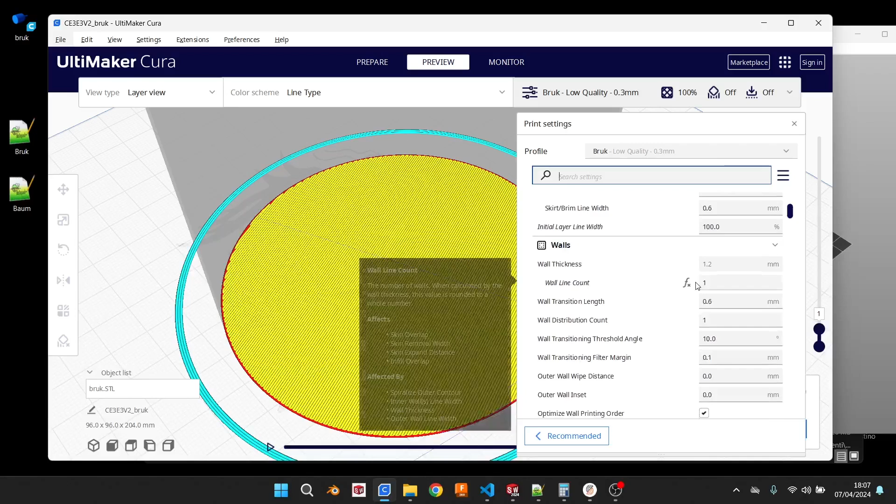Bruk and Baum are sliced with vase mode and with settings similar to these ones. I say similar because I did it some months ago and I don't remember exactly how I did it, so I'll try my best to reverse find how to slice it. So here I'm showing the settings.

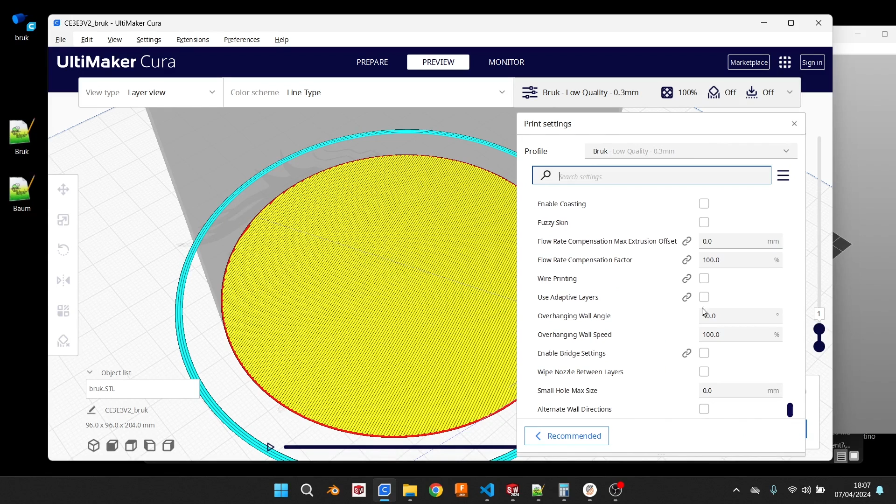These are temperature for polypropylene, and the important setting is the line width, which is 0.59, and layer height, which is 0.3, and also vase mode. So we have 4 bottom layers and only one wall with the infill zigzag 100% and connected lines with a lot of overlap. It's, I think,

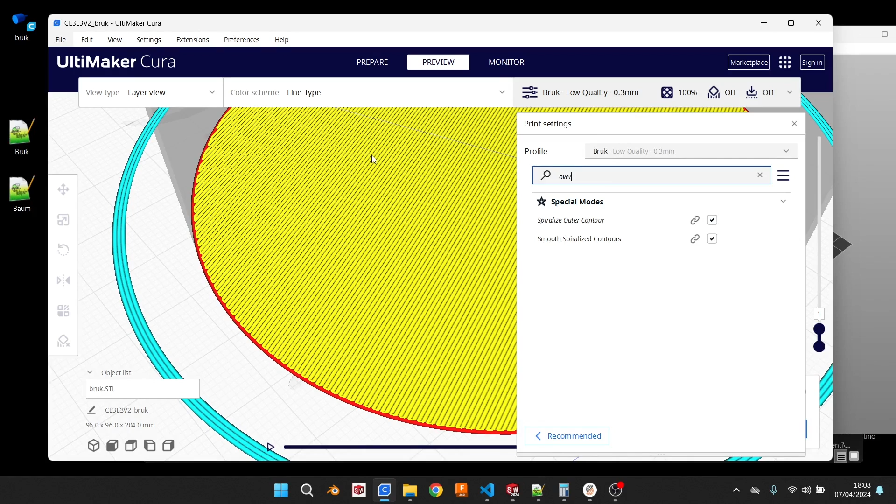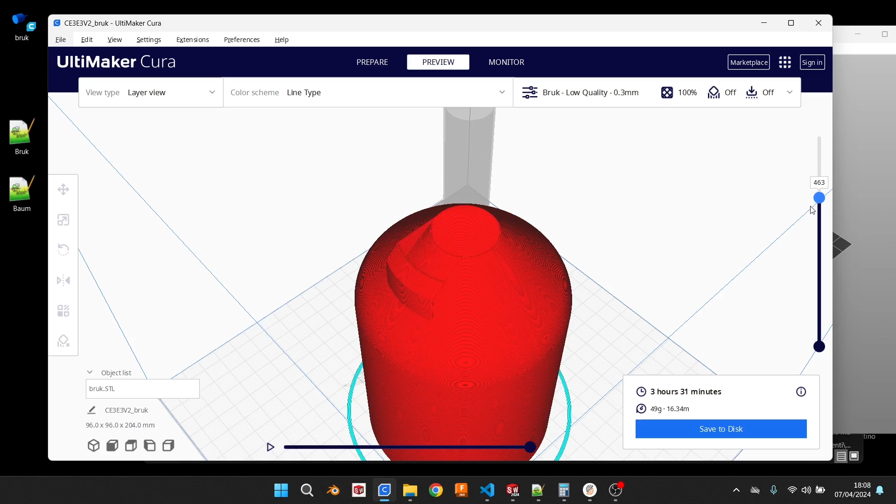80%. So let's see, this is the first layer, the second, the third, fourth, and then we start with the body, which is vase mode. And then here, which is the part where the top goes, is still in vase mode. So the line goes like this.

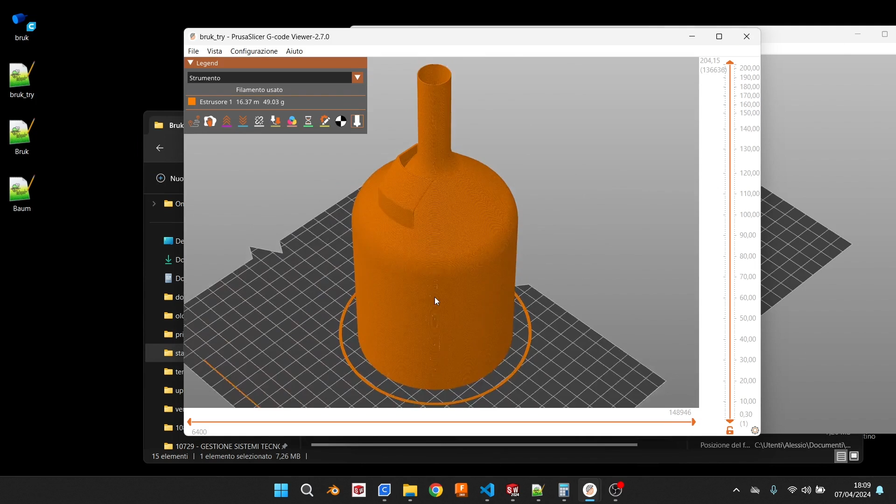Okay, the problem is that it's not enough to make only one G-code, because we would have some problems. So first, I used different flow for this part, which is straight, and this second part, which has a bit of overhang. In fact, I used 0.3 layer height and 120 flow for this.

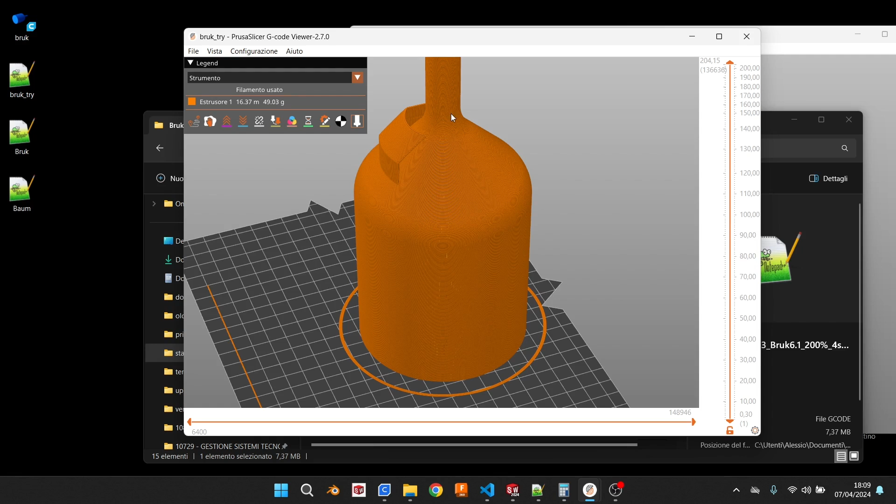And then I joined this first G-code up to here with a second G-code which goes from here to here, and which has a different layer height of 0.2 and a much higher flow of 150. So also a bigger line width. We have the same line width, but if I increase the flow, obviously the line width is 1.5 times the line width I would have without increasing the flow to 150%.

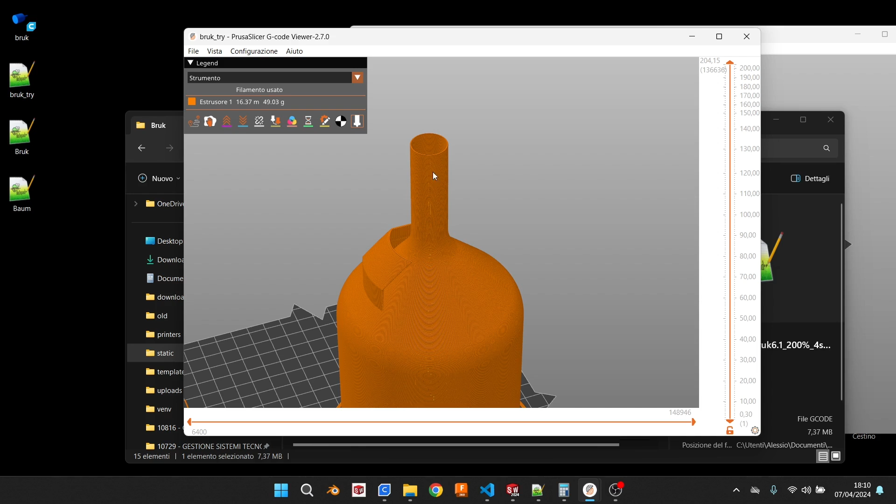So from here to here. And the top from here to here, it's 74% of 150, I think. But the bottom line is that this has a final line width of 0.5 and a layer height of 0.1.

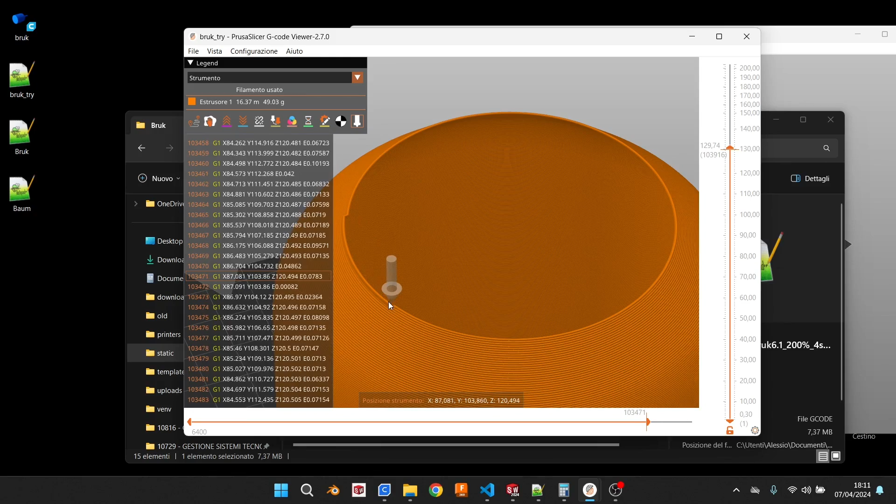So I joined the 3 G-codes together, and here we see another problem we would have is that in this area, the nozzle goes up to here, and then it comes back on the same line, and it goes back like this. And we would not have these two lines attached one to the other.

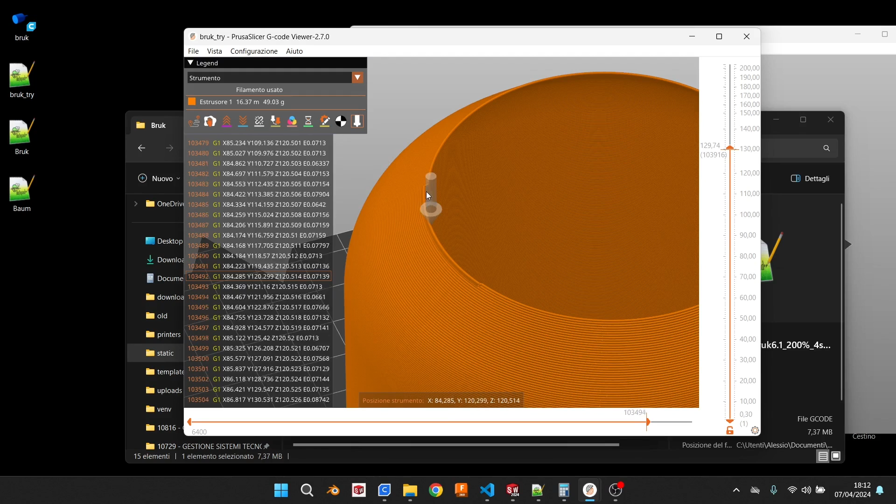So what I did is I used a Python script to change the X coordinate of this line from here to here to have it a bit on the right. So we would have this line, then a line a bit on the right when the nozzle comes back, and then from here finally the third line. So if we have 3 lines instead of 2, we would have them joined together. So let's see the final G-code.

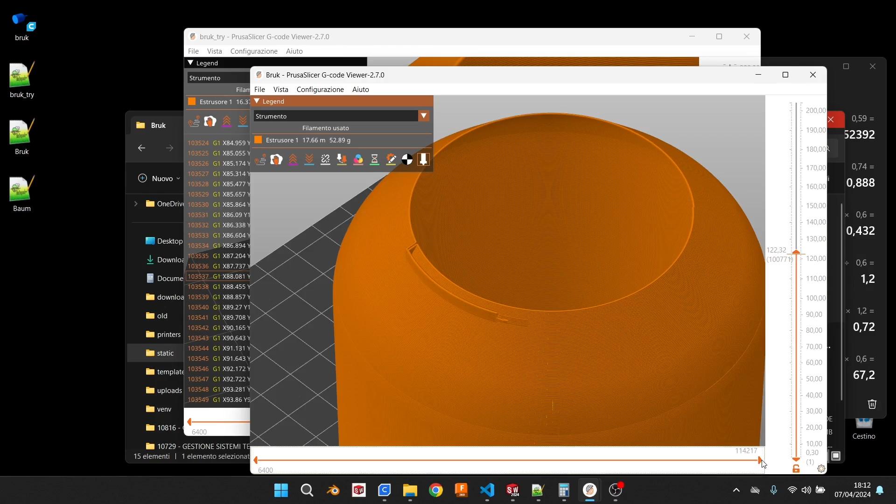So we have the first line here. Then it goes a bit longer because I saw that here we would have some water leaking. Then it comes back a bit shifted on the right, and finally shifted again on the right. It's shifted by half line width, so it's, I think, 0.4 shifted.

Okay, so this is the first modification I made, and I used this Python script where you can set the offset of the G-code on the X and on the Y. Here we can also see that for the same problem of water leaking, I increased the flow of some lines around this area to 200%.

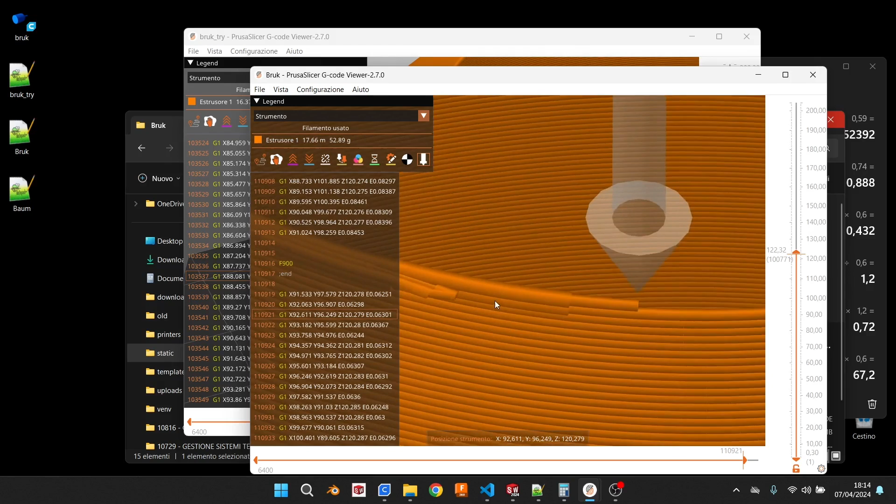So for example, from here to here, you can see the line is a bit bigger because I increased the flow. So from X, so here, and I wrote it in the G-code, flow is increased to here, and then it goes back to normal. So as you can see, this line is bigger than here.

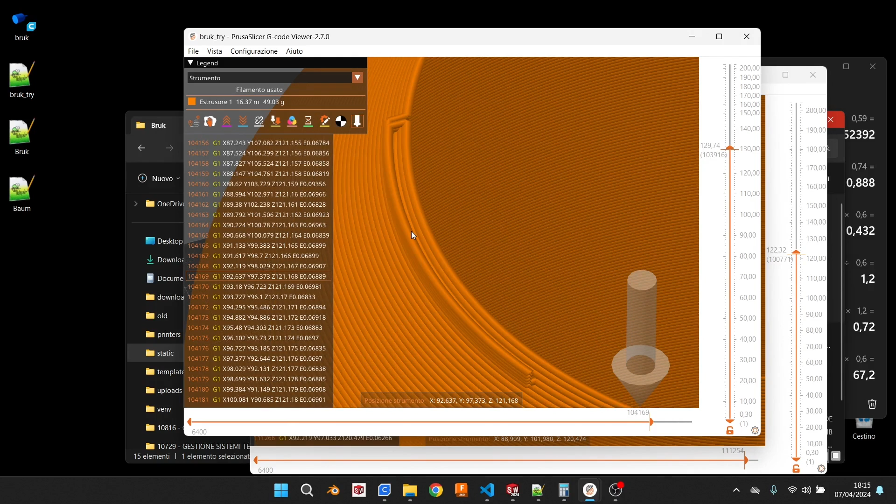The shifting on the X, I did not do it only on the first layer I showed you, but for I think 1, 2, 3, 4 layers. Let's see the original G-code. So here we would have this same line that goes first on the outside, then again on the same outside, and then on the inside. So we would have this line very far from this one.

And the change I made was that now we have the first line on the outside, the second is in the middle here, and the third is on the inside. So we have them joined together. This way we don't have the water leakage from this area.

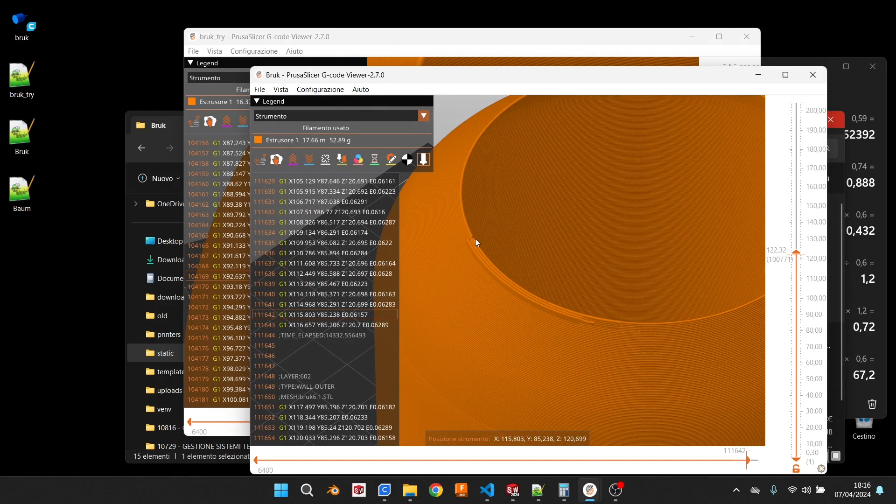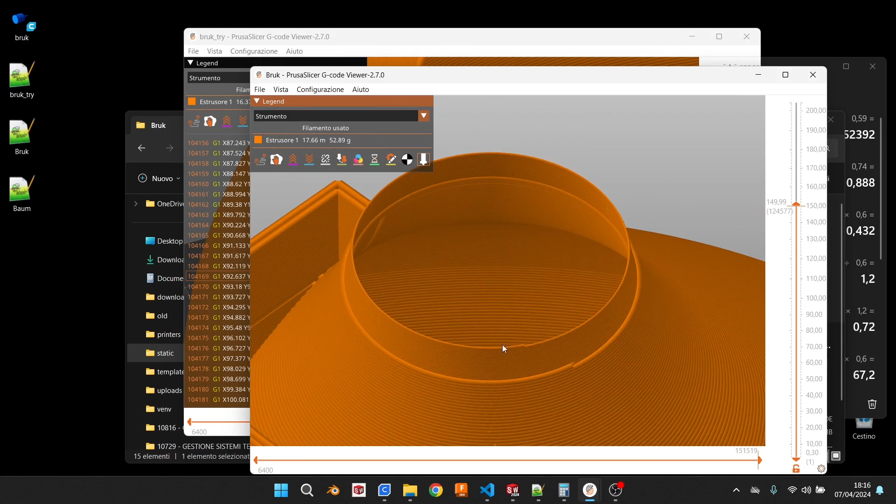Then the rest of the G-code is unchanged, except here I attached the third part, which you can see has a lower flow and a resulting line width of 0.5 and a layer height of 0.1 instead of 0.2 here and 0.3 here.

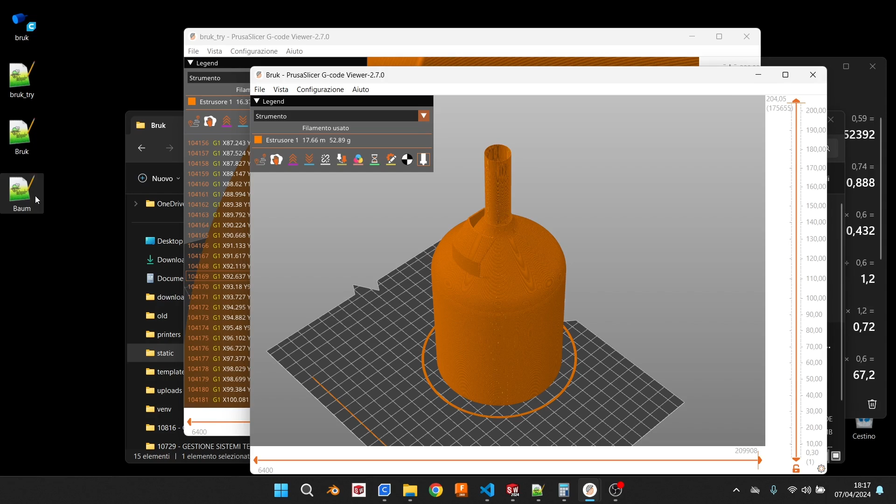To make Baum, I used the same G-code from here to the top from Bruk, but I just changed the G-code from here to the bottom. So this is Baum, but as you can see, the G-code here is the same I used for Bruk.